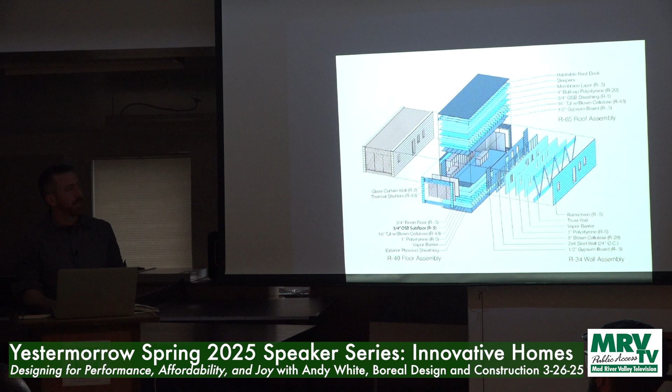I went to the University of Oregon and got a master's degree in architecture. And there I continued to look into what we could do, how we build things differently, et cetera, to achieve these goals. This was a studio project that I did. There were a lot more drawings that look a lot better, but this is looking at essentially a housing module that could be developed for super low cost. That's high performance, could be configured in a variety of orientations, added onto over time, picked up with a crane,

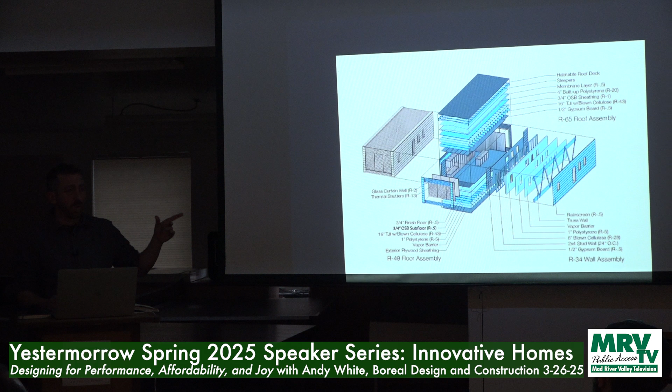et cetera, et cetera. The takeaway being that embracing very simple forms and using inexpensive materials in creative ways seems to be one of the keys to driving that cost down. I didn't set out to make a little rectangle. It was driven toward that by my findings, and then I decided to just embrace the rectangular nature of the thing.

This is a firm I worked for in Portland after getting out of graduate school, and I think this is a nice example of, again, these are pretty nice materials that they're using, but highlighting the materials of the structure rather than taking a pressure treated beam and covering it, or taking whatever that beam is up there, right, a quadruple LVL or something, and then wrapping it in drywall and then mudding that drywall and filling the screw holes and then painting it. If you can just leave the materials visible and honor the work that they're doing and express the beauty in them,

it's not a sure thing, but there is possibility for reduction of cost in that, as well as tying the building to its site, kind of honoring the means and the materials involved in the construction of the building, giving more grounding and meaning to the building, can be done essentially at no additional cost, right? If you're forward-thinking and wise about how you tackle that. Excuse me.

So then, I moved back here in 2017, started Boreal Design. This is just kind of a cruder, rougher take on that same concept. This is my own house, right, where you can see just dimensional lumber, exposed essentially as the ornament, and exploring some different wall construction methods. This would be a Larsen truss we used on this project. There's my brother helping me out for the weekend. Compact footprint. This is another project.

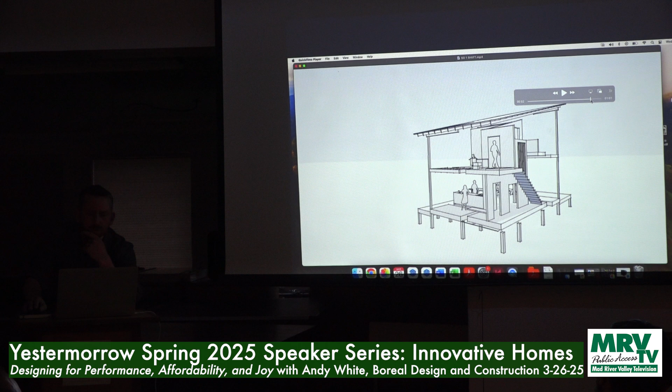Pretty simple, right? Bedroom, bath, stair, front porch, back porch, big deck. We didn't end up getting this clear roof at the end of the day, but pretty simple footprint, simple form, simple building. The shed roof was an aesthetic choice from the jump, as well as functional for how the building interacted with the site and the views.

And then this was the simplest version where we just made a real simple box and then put all the stuff outside, right? It was like, okay, you got a little teeny box to work with, and we're going to try to make a dynamic interior space, but most of the action is going to be happening outdoors. So that's it. Kitchen, living, dining, mechanical room, bathroom on the left, stair, and then there's just a bunch of cool outdoor space that happens. I thought that one was pretty good.

And then we also looked at this one, which I think was the most compact of the floor plans. Basically by shifting these floors, you can see it here. So by playing with the different heights of the floors, how they related to each other, it allowed us to radically reduce the length of the stair, which in a footprint that's essentially 20 by 20 really eats up a lot of space, especially when you consider 3 feet of circulation at least at either end of the staircase, right?

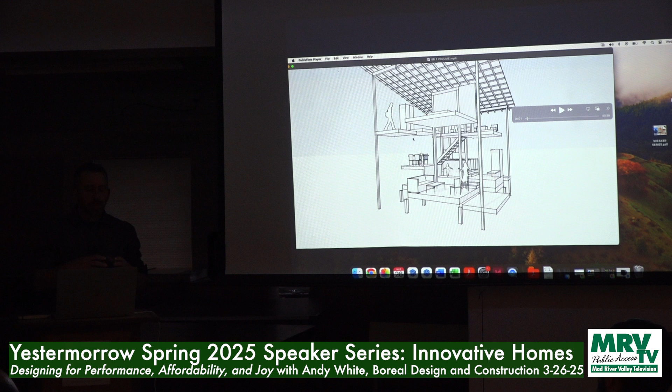So by kind of taking the spaces that we had and pulling them out of a rectangle and arranging them more in this pinwheel pattern, and then also playing in the Z-axis, it allowed us to cram a whole lot into a small footprint there, even if it didn't have the exciting action on the outside. And they took strongly to this one, I would say. The obvious downside that we discussed at the time is this has a million corners and things like that, but it was an interesting study in the use of space.

And I think we learned a lot from going through the whole process, and it gave me good direction moving into the rest of schematic design, design development, et cetera. So I took that back and started crunching some back of envelope rough numbers for these different things, making it like an apples to apples comparison. I had kind of ABC, most expensive to least expensive, figured out, but I didn't know what the top and the bottom was.

And basically came away with, this is neat, but you can't afford it. It's probably going to be more like this, but with fewer decks outside. And we also probably can't afford these jogs. This one was too inefficient due to the amount of circulation space that was required, basically. Made the footprint unnecessarily large for what you got out of it.

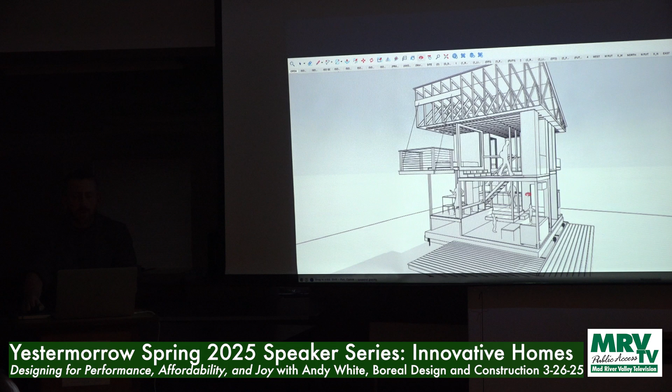And we were able to get, on the upstairs and the downstairs, it's basically, now I am going to go to the SketchUp model so that we can see what's going on. We came up with this simple plan. So it's just a big box on the exterior, right? It's a big shed. You're not supposed to use SketchUp models as a presentation tool, but this project is kind of difficult to get your head around from drawings, and even photographing it is difficult, but it's all there.

So you can see the basic floor plan is these 4 platforms arranged in a pinwheel shape around the central stair. So we maintained that stepping condition that we had. We ended up moving the entry and the back porch, doing a bunch of other stuff. But we have the entry, and then over here we roughed it in for a half bath and mechanical room, and it was going to serve as a closet in the meantime. This is kind of the mudroom area. There's a coat rack over here. This is the living room.

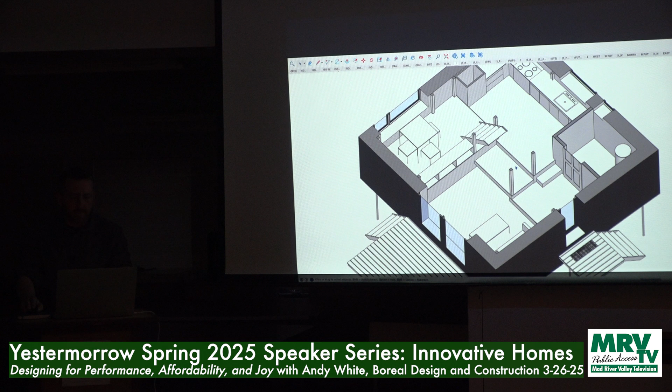You have a self-contained kitchen, and then actually an entire dining room, essentially. And the interior dimensions of this are only 20 by 20 feet. So being able to pull off a dining room in there, I was pretty happy with how that worked out. The ceiling often steps with the floor, and that creates this additional spatial definition, as well as allowing visual connectivity between different floors, different parts of the building. That living room is, let's make this big again.

Of course, the dimensions are on the framing plan that I didn't put in here. Oh no, it's 8 foot by 12 foot 8, which is tiny to the point that I told them we couldn't build this design and that it was not tenable. And they told me, well, I don't know, it sounds good. Like, this whole thing here is a day bed, that's like a couch, and then you can sit up here in the living room and swing your legs over, and that's like an extension of it. And they sold me, and I was like, hey, it's your house, good luck.

But the reality of the situation is that you get this really nice spatial definition of, like, when you're in the dining room, you feel like you're in the dining room, and you don't feel like you're in a big empty box. You don't feel like you're in a barn. You feel like an intimate connection to the people around you and the table. But you look over your shoulder and you have a 30-foot line of sight from this corner to this corner. You see that full 20 feet, and you actually see, this is what's going to be hard about this one to show in a project.

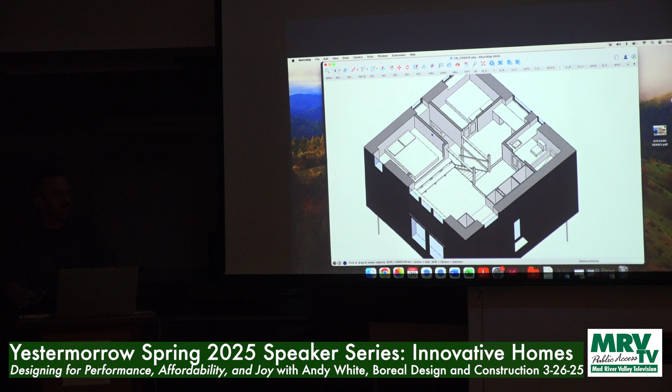So I think that, I've said this before, but Chrissy and Sam, finding a client who is willing to reimagine how they use space and think about what is it that I live in, and how do I live, and how do I want to interact with the other people in my space, and how much privacy do I need, how much do I want, where do I want it, where do I need it.

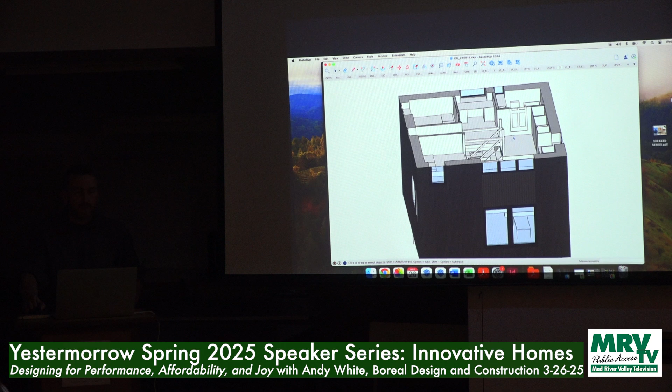It allowed me to have a lot of fun in the design and the build, and really kind of push some ideas that had been kicking around in my head that I haven't been able to flesh out prior.

So let's not get into a wall section just yet. Let's look at some pictures of the inside. This is a building science thing. We could talk about a wall section. We'll talk about a wall section real quick, and then we'll look at a bunch of pictures. This detail is actually taken from a different similar project, because I'm not sure where the detail drawing is for this wall, but for all intents and purposes, it's the same.

So I have built a lot of... I sometimes forget what my audience is here. I'm gonna go pretty basic real quick. So insulation is measured in an R value per inch typically. That tells how much insulative value you get per inch of insulation, right? So if you have wood, that's R1 per inch. If you have a foot thick wall of wood, like a log cabin, that's an R12.

Foam, board foam, is R5 to R6 per inch, right? So if you had that same 12 inches thick of foam, you'd have an R60 or 72, right? So it is considerably more insulating than wood. So if you're trying to get up to these higher R values that we're shooting for in this level of high performance construction, you can either use more insulative materials or you can make a deeper wall, right?

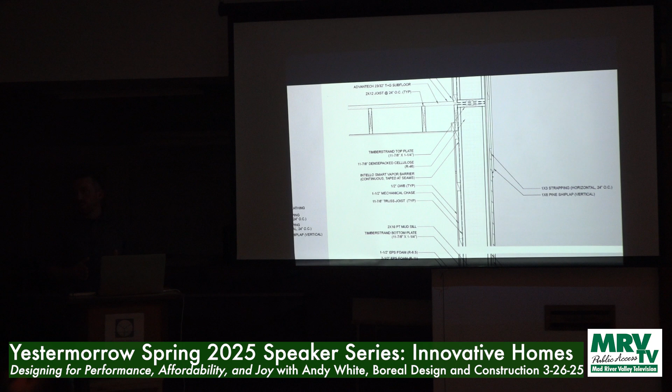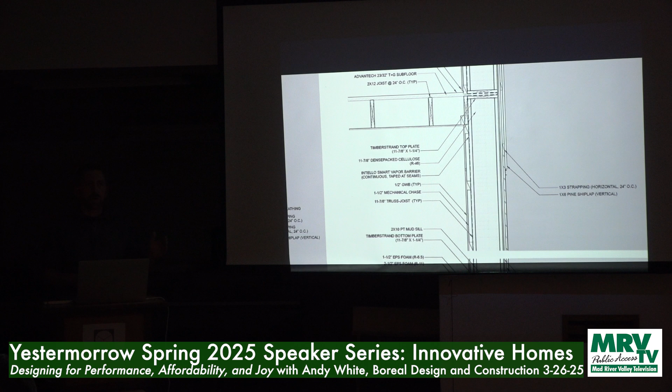And you only have to build the wall one time. So the double stud wall has a lower material cost, but considerably higher labor costs. And I think that the end product is not quite as good. So I've done a bunch of double stud walls. I've done a few with continuous exterior foam. And this is now my second house I've done with the TJI wall. And these are the straightest, squarest walls that I have ever built. So we used the TJI for the structural wall as well as the insulation cavity. And then we attached 2x3 furring strips to the inside of that.

Oh, so we did the TJIs, and then we covered that with Intello, which is a smart vapor barrier. So it prevents moisture from entering the wall cavity, but it allows it to escape if moisture does get inside. And we taped all the seams pretty meticulously. So the airtight layer as well as the vapor barrier are both at the interior of the insulation plane. And then we attached 2x3 strapping to the face of those TJIs outside of the Intello wrap. And that provided us a mechanical chase to run electrical wire, plumbing supply lines, other odds and ends without needing to constantly penetrate that air barrier that we just spent so much time and effort putting up.

It's a challenge if you detail your house in such a way that the air and vapor barrier are at the inside of the wall and then you sheetrock directly over it. Anytime somebody wants to mess with that sheetrock, like electricians are gonna be punching holes in there by accident probably. If you wanna go put a towel rack on your wall, you put a bunch of holes in it. If you wanna hang a picture, you put a hole in it. So we established this 1.5 inch deep mechanical chase, and then we attached our drywall to that.

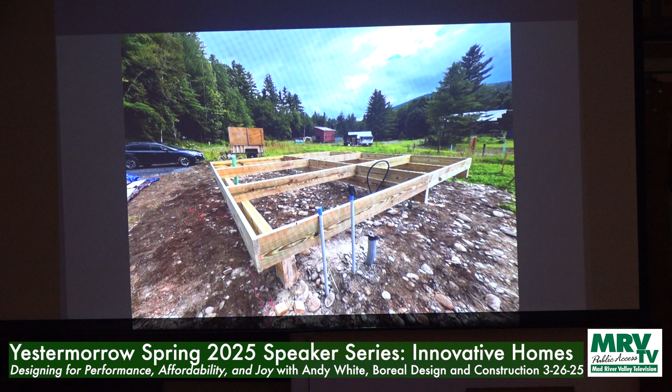One of the challenges with using the helical pile foundation is that you have insulated cavities that are going to be exposed to weather while the building is under construction. So figuring out how to cross that bridge is a challenge, and that was actually one of the bigger challenges that we faced. I think it took us about as long to build this deck and insulate it as it took for us to build all 4 walls, which, when you see how big the walls are, kind of says something. So these are the walls being put together. So this is a TJI.

We made them 18 feet long, so we balloon framed the walls. So we built a big cube, and then all of the interior floors are self-supported or hung from the TJIs inside. In a typical platform framed house, you build one wall and then you build a floor on top of it. And then you get up on top of that floor and you build another wall.

And every time you have a floor, all of those floor joists penetrate to the building exterior, and that wood then conducts heat or cold, however you want to look at it, conducts energy through the wood itself, which is a relatively poor insulator. So it's a point of pretty heavy heat loss. So by balloon framing the building, we have this continuous wall of 12 inches of uninterrupted cellulose insulation that goes from the floor to the ceiling with no penetrations through it.

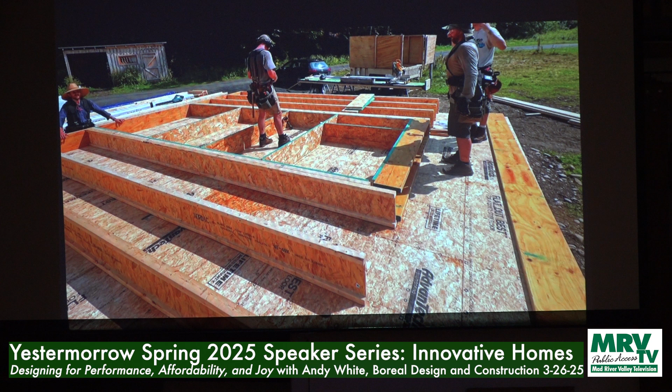So there's one laying on the deck, ready to go. And there's it when it stood up. And I'll show you, I got a couple of videos of our method for putting these up there, which I think was pretty neat.

So this is how we started out. I have these wall jacks that I've used on previous jobs. You put a galvanized pipe in this little bracket. You put it on a fir 2x4 that you brace at the bottom, and then you can crank it up, you move the wall. So we hitched a rope to the top and connected that to the truck to use as a safety, and we're just slowly ratcheting these walls up.

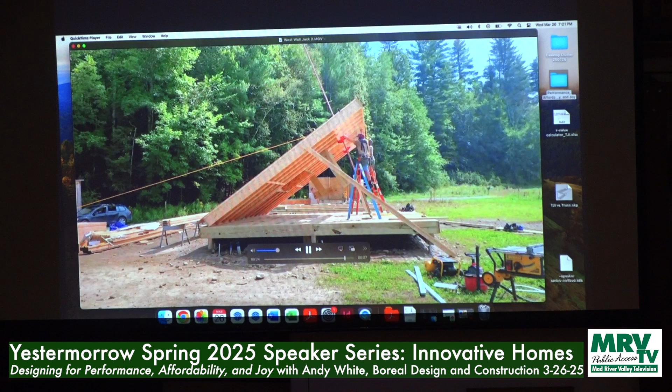You can see we have braces here, they're digging into the dirt to also help catch the wall if something terrible happened. It's toe-nailed through the bottom plate here, so it's hinging on those nails. And we've already put on the sheathing, so the wall's perfectly square, all of our blocking's in, all of our window framing, and we won't have to climb back up to sheathe that later. It's going to be all done. So after an hour or two of that, we got pretty confident, and we just used the truck to drag it in the rest of the way.

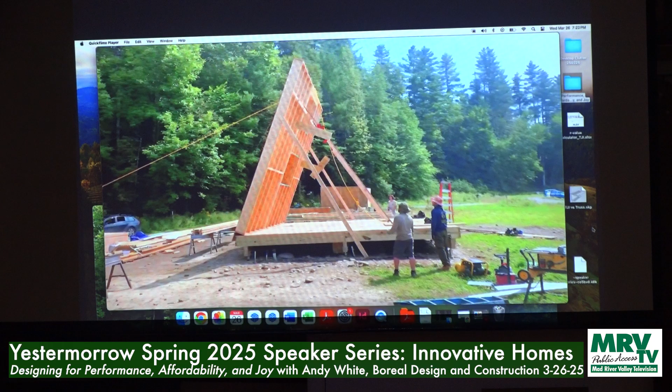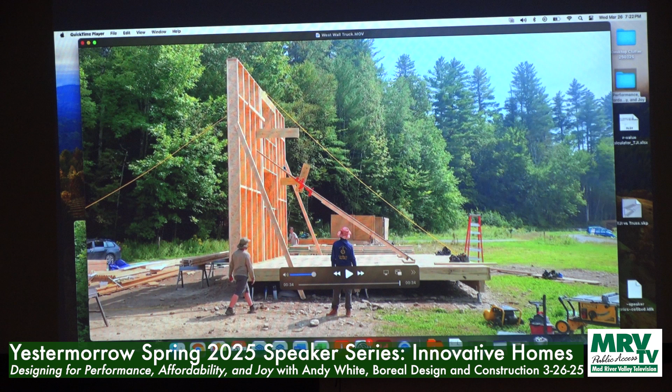We've got these big ugly braces that we put on there when we first lifted it off the ground so it wouldn't crush anybody, and then we didn't take the time to remove them as it went up. So they really kind of ruined the shot. But yeah, and there she is.

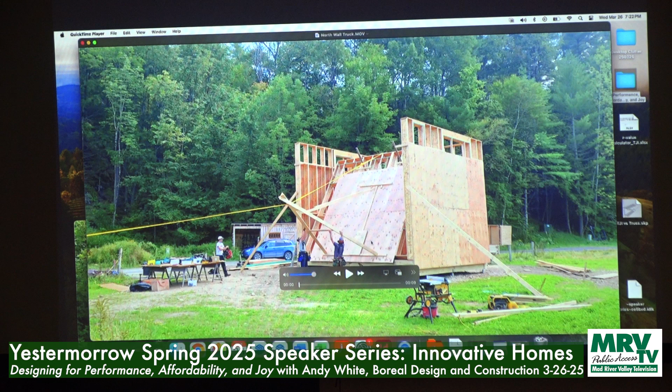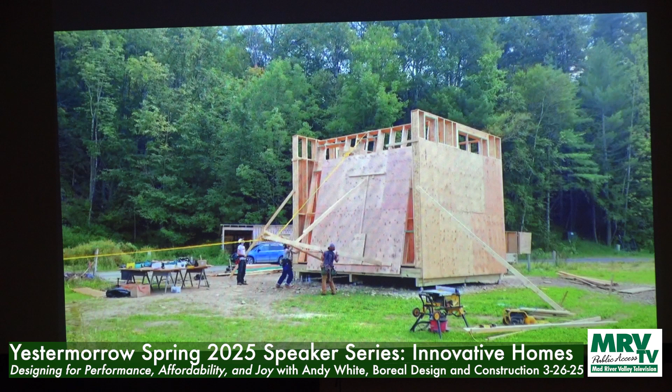And then once we saw how successful that was, we started using the truck more. We built this thing called the Dead Man. So that creates a fulcrum so that the rope goes from the top of the wall up over the pivot point and then back down to the truck. Otherwise, you would want to pull the wall directly off the floor deck sideways. So it transfers the movement to going up. So we barely used the wall jacks. So we got it pretty well dialed in by the end.

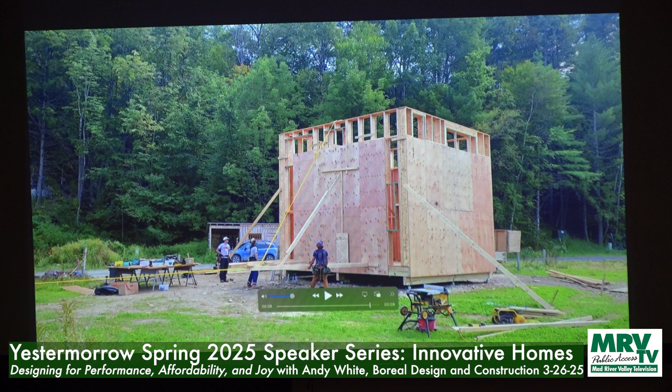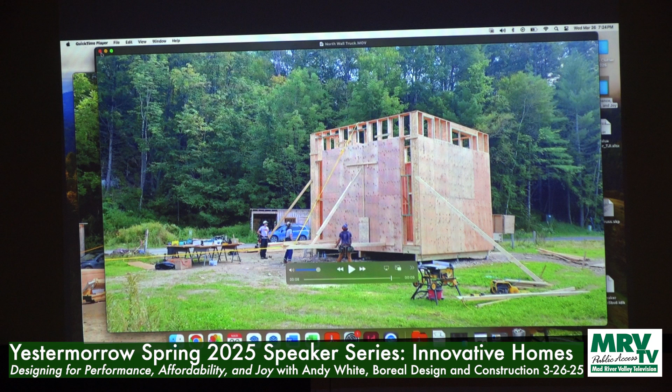And you can see here, this is that CDX sheathing, which from a purely aesthetic standpoint, you don't realize how ugly ZIP is until you don't look at ZIP. This was so much more pleasant not being a big green box. It looks like wood, it looks nice. It looks like it would dry out if you got it wet. I'm a huge fan. So that was the fourth wall that we put up.

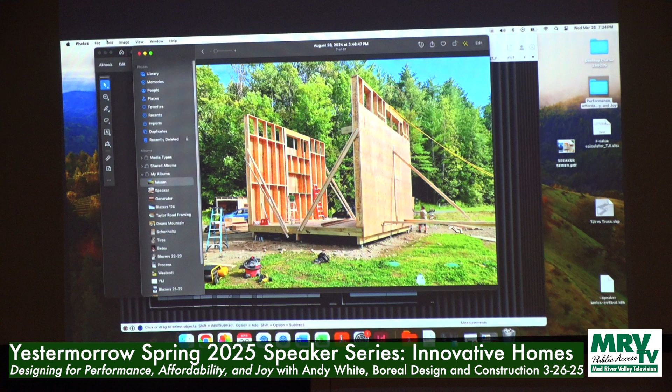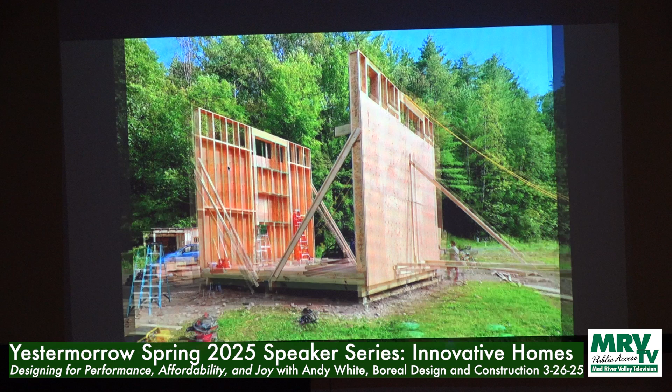And so that's two walls on there. You can see we did 24 inches on center. We also put little pieces of foam in between these TJIs where they bump up next to each other. There's like a rip of foam in there. This is an LVL inside and outside of that header and just a big sandwich of foam in there. So we used foam where we needed to, sparingly, where it made sense, to maximize the insulation in the envelope.

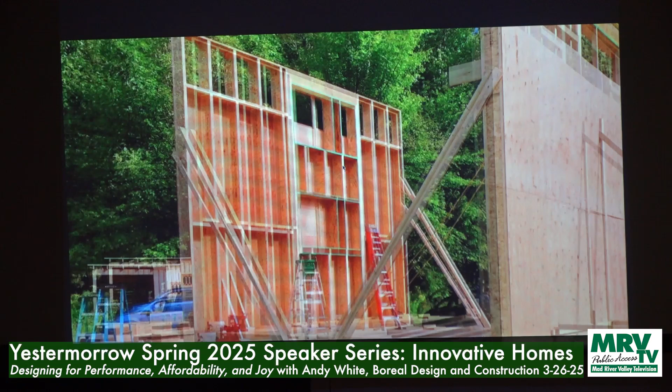I think you can really see in this picture, you get a feel for how much insulation is going to go into this thing, right? Like you can just look at that empty wall cavity. And again, we stood up all four of these walls and we did not need to shim or adjust anything. We just tipped them all up, we screwed them into each other, and they were plumb and square and ready to go. And I don't think that's because of me. I think the TJIs played a large role in that, and just the ability to make a wall that size in one shot.

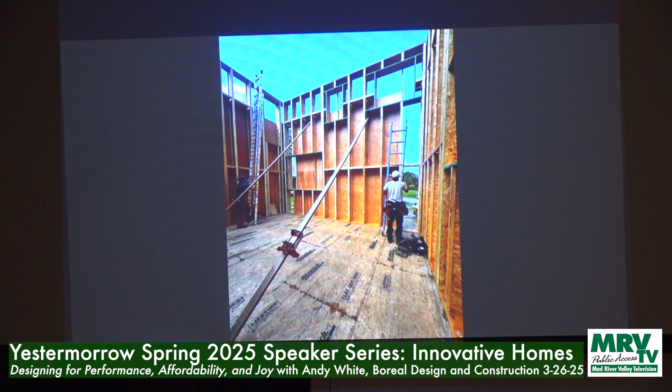That's it from the inside on another wall. Those are those lifting jacks. Somebody taking a break on the Dead Man.

So there's Sam checking out a window. It was pretty wild, framing all the windows when the floors aren't in there, right? Because you don't get a sense of how they're going to relate. We drew this up as that window seat being deep and actually acting as a bench to provide seating for the dining table. And when we tipped the wall up, you guys weren't that skeptical, but you were like, where's the floor going to go? Like, are you sure that's a seat? Like, it doesn't look like a seat. And then here we are.

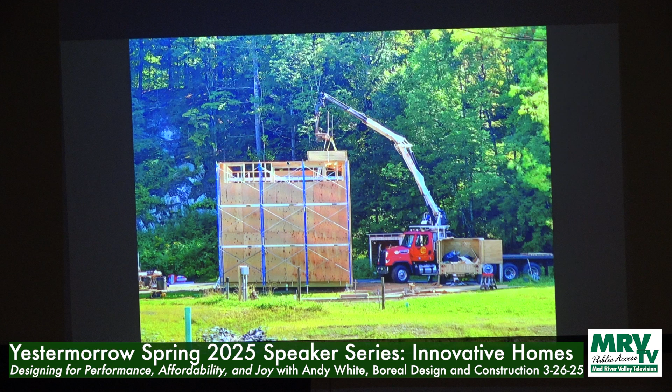This is them delivering the trusses, just did a simple truss roof. Macaroon took this very artistic picture of the 9 cubes of staging perfectly matching the building. I don't know how long it took him to walk around and get that angle, but that was pretty sweet. So yeah, then we just ran up there, simple truss roof as per usual. We had to wrap up the end of the sheathing from on staging, which is what it is.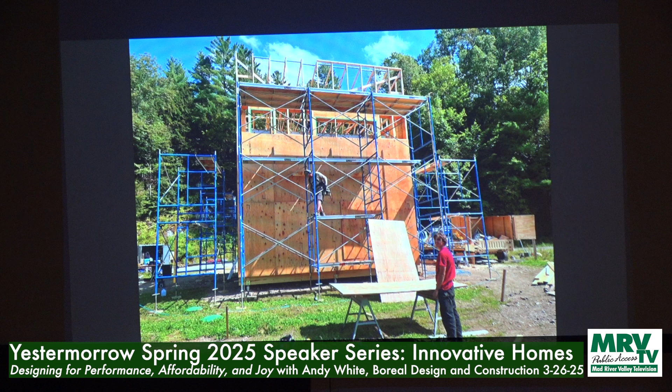And then here's that 15-pound felt applied after the sheathing was completed, right? So this is just old-time house wrap, cap staples. There was some labor involved in going around the building and nailing this off. The guys may have been a little too meticulous with this nail pattern. We could have just left this exposed. They did a really nice job.

But this is very inexpensive. We saved a lot of money switching to the CDX and the asphalt felt. Asphalt felt is really cheap. It's like 2 cents a square foot or something. I forget, but it's very, very inexpensive. So there was a little bit more labor, but I think it was a wash compared to doing the ZIP system. And again, it's just a tried and true method.

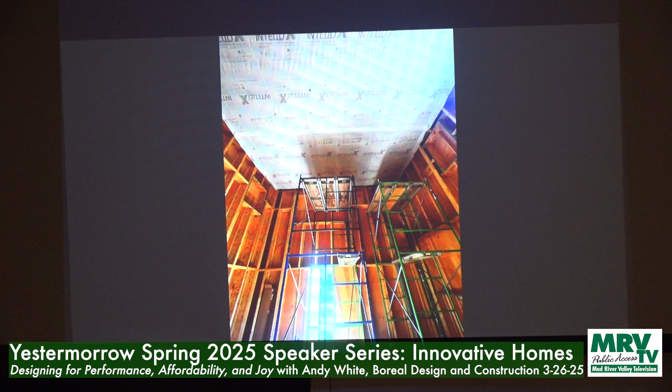And then this is a shot looking up at the ceiling. You can see the Intello wrap going on. And remember when I mentioned you can see the cavity depth and just imagine all the insulation that's going to go in there. This is the insulation dropped off before it's blown in. So these are all bales of dense packed cellulose that's going to get shot into those wall cavities. And here it is. So this is the smart vapor barrier. All the holes where the insulator punched his tube through there to dense pack the cavities.

Windows installed. And this strapping is the mechanical chase that I was talking about. So that's what sheetrock is going to be attached to. This is the space after they rocked it.

We had to rough in, this was a tricky part. We had to rough in our outlets and switches where they were going to be based off of invisible floors. So fortunately I had an electrician who's a good sport and seemed to appreciate the challenge. He didn't complain at all. I was just like, yeah, so this floor is here, and we'd like all the outlets approximately 14, 16 inches off the floor. And he was like, okay, cool, I got it. And that was it.

This is our Lunos heat recovery ventilator. There's another one on the wall behind me there. That provides fresh air to the building in an energy efficient manner.

And then I didn't touch on this at all. We went with corrugated metal siding for the finish. It was another one of these decisions where the price point was an obvious factor. It's a very economical choice, especially from a material standpoint, and the labor. I mean, doing the trim around the windows and corners took a while, but we were knocking out a wall every 1 to 2 days with this stuff, which, if that were shiplap up 22 feet or whatever, 27 on the high side, that would be a different animal. That was 2 guys, 1 wall, like a day and a half.

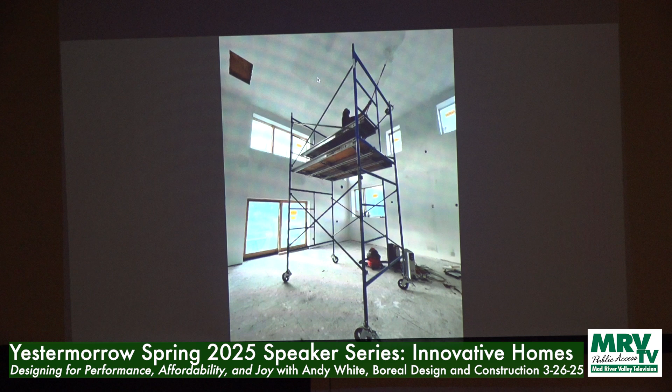But yeah, that's the paint going on. It was kind of nice as just a huge white cube. There was something about it that I liked. Sam and Chrissy built the deck. I did the design and gave them the drawings and purchased the materials, and then they provided all the labor. They saved some money that way.

So that's not something that I could count on to be repeatable for future projects, but that worked out well for you guys. You did quite a bit of the heavy lifting in here. Not maybe the light lifting, but like tiling the bathroom, all the finishing of the materials.

We had originally spec'd a floor to ceiling fiberglass tub shower insert, again for cost reasons, and they ended up going with just a bathtub and then doing a beautiful pink hexagonal tile surround inside, which would have again put us over that original budget number that we were shooting for. Oh, we overshot that original budget number way early on in schematic design. I buried the lead there. It's kind of an important part.

But I believe with their contributions and including the site work, the septic, everything but design, the project total, we haven't tallied the whole thing up just yet, but it's going to be right around 280 grand, which I was pretty happy with. And again, they did a lot of the work, and prices are climbing constantly, so 300 grand is probably a more fair price.

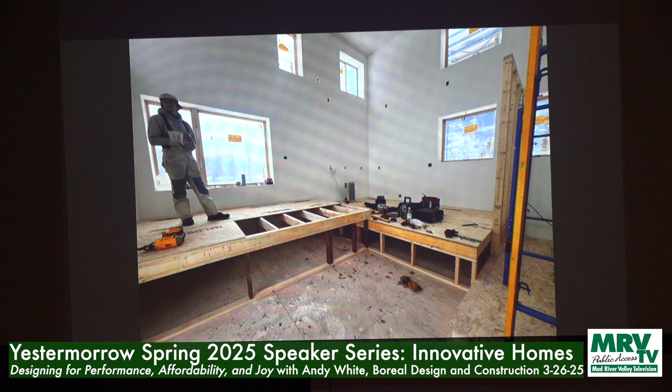It was really fun to get to do framing after the finish work.

That's a terrible picture of me. That's all good. That's not your fault.

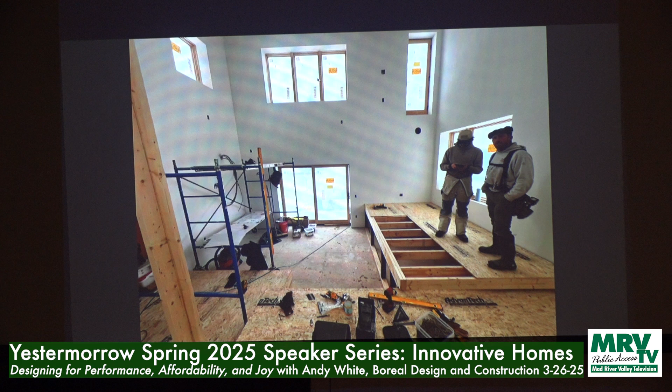But yeah, usually you frame the whole house and you see the rooms and the shape of everything and where the light's going to be and where the doors are, and then you do all the sheetrock and it gets dark for a while, and then you do all the paint. This was really fun where we built the whole shell and then got to build a bunch of little, it was like building a treehouse every day. Every day we built one new platform and then would get up on it. Like, oh, so this is the bedroom. This is pretty cool. So from a builder's standpoint, it was really fun.

This is when we're in construction. Again, we used construction grade fir for these posts, which was quite affordable. This is 2x6 spruce. Just regular number 2 framing lumber that Chrissy and Sam gave one pass through the planer each side to take the stamps off, and then we threw it in there. Utilizing that small footprint allowed us to get away with really small spans and therefore go light on the framing lumber.

So these platforms are only 6 inches thick, which is nice from a visual standpoint. When you're looking from the kitchen up into the bedroom, it would feel very different if that floor were a foot, which is more traditional. But it also meant that the material cost for this phase of the project was very, very low. And then we, again, used the structural sheathing as the finish, and that's it. That one's done.

We went outside the box a little bit and kind of on the fly, instead of using traditional joist hangers, we went and bought just 2x2 angle steel and painted it, and then lagged it into the rim joist. So you can see this is just a GRK lag that's holding that sistered top piece together. This is another one that's then holding the ledger onto the wall.

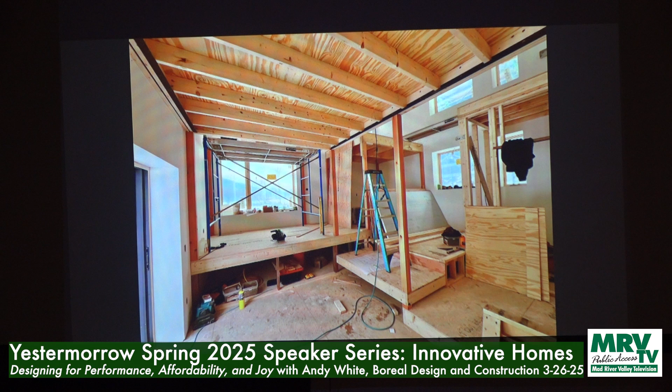Yeah. Is there storage underneath that dining room? Yeah, there is. We just built little magnetized... Skip ahead. So you see this? We took one sheet of plywood, finish, and then cut into it so that the grain all matches and it looks like one piece. And then we mounted magnet catch hardware onto the back and just drilled these little finger holes into it. So right now those panels just pop off and you set them aside.

I kept pushing, I am still pushing for some kind of cabinet carcass on casters, and then you just attach that piece of finished ply to the face, and then you could pull it all the way out. You could put a bed down there. You could put deep storage. If you have company stay, you could wheel that out. They could sleep on it during the day. You could wheel it back in. I think it'd be very cool. But we didn't do it on this one.

One thing I'll say for Chrissy and Sam is they did a very good job of sticking to the plan and the budget and not adding a bunch of stuff on the fly, which as a builder you have a limited amount of control over, and the best you can do is advise and keep people apprised of the situation as you go along to avoid an uncomfortable surprise. But that could take a project like this, and if you start changing things and stopping progress and moving stuff, that price begins to balloon pretty rapidly.